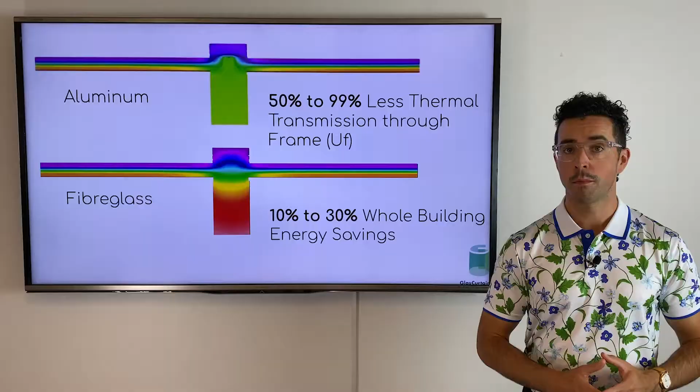At GlasCurtain, of course, we wholeheartedly believe that life and safety are paramount. And the Building Code of Canada is mostly rational in achieving this aim. But it also has newer and increasingly stringent energy efficiency and thermal performance objectives. And these can be at odds with other, older sections of the code.

So how do we square the circle, given that fiberglass materials in general and our thermoset polyester fiberglass reinforced polymer mullions in particular are considered combustible when used in an exterior window application?

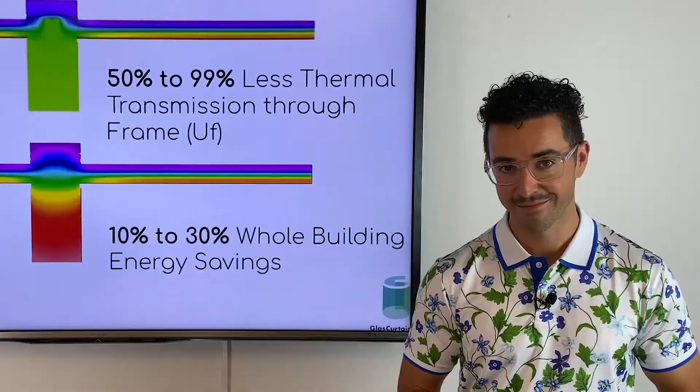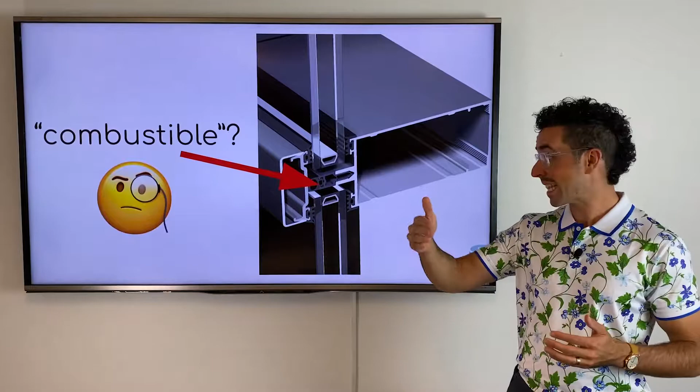While we won't dig too deeply into the problem of even defining combustible in a world where conventional aluminum frame curtain wall systems are required to use, by the Energy Code, combustible polyamide breaks at the exterior or in the center of the glazing line, the National Building Code of Canada makes exceptions and a path to acceptance for building products that can successfully demonstrate their ability to limit the severity and effect of fires,

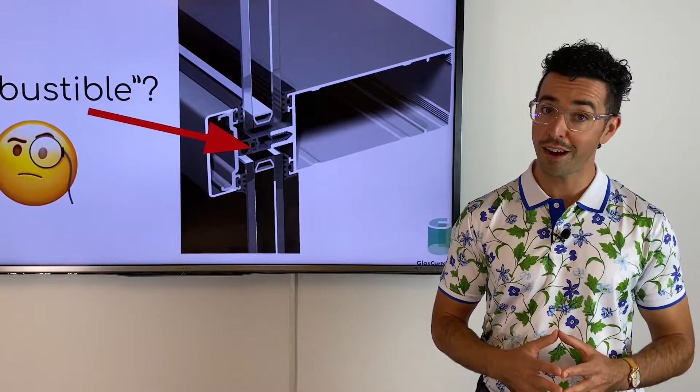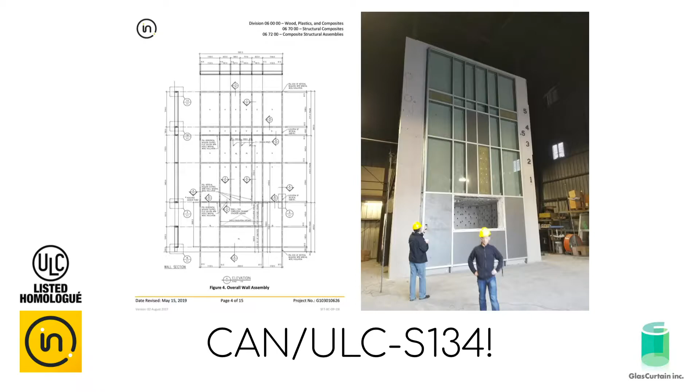the details of which are outlined in section 3.1.5.5 of the National Building Code of Canada. But the essence is basically this: pass CAN-ULC S134. So what is CAN-ULC S134? Well, I'm glad you asked.

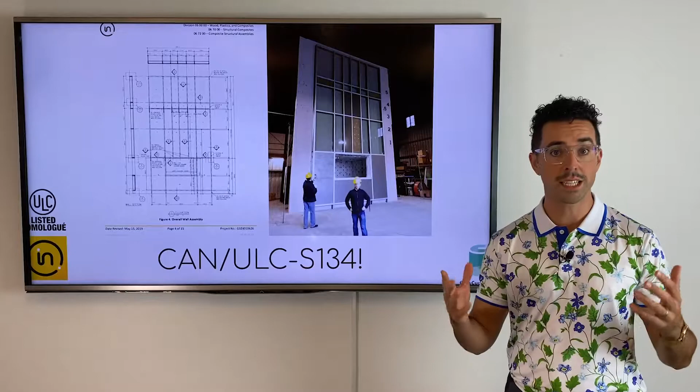Designed around a 3-story assembly, the CAN-ULC S134 test is designed to simulate a real-world scenario that tests the worst-case scenario in the event of a fire. This test is specifically designed for claddings and curtain wall systems.

With a 2.5 meter by 1.4 meter blazing inferno designed to simulate a broken window partway up a multi-story building, this rigorous and hugely demanding test starts with a 20-minute fire in the combustion chamber. The fire is then turned off after 20 minutes, and the cladding or curtain wall material then has to self-extinguish completely after a further 20 minutes.

Passing this test also requires that flame spread height and temperature flux tests also be passed. Heat flux transducers are placed throughout the assembly and cannot pass very specific thresholds for the duration of the test. For any one of those heat flux transducers to exceed their threshold is an immediate failure in the test.

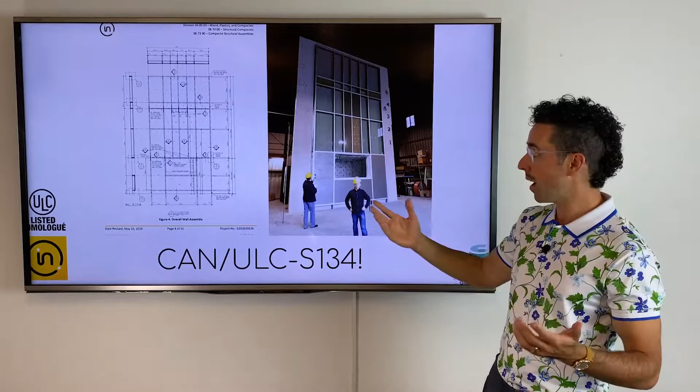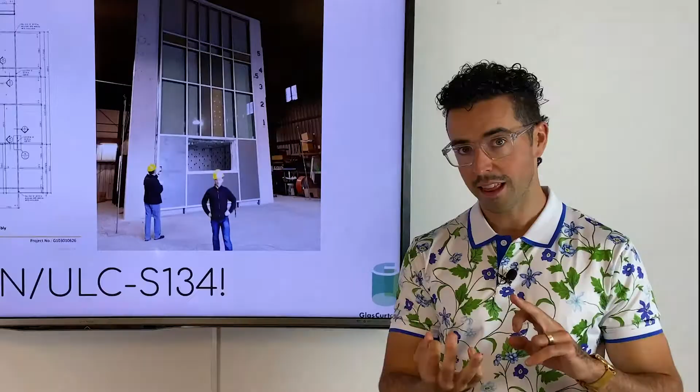As well, in terms of flame spread height, 5 meters is the limit that the flame can reach. And this distance is measured from the top of the combustion chamber. All of this is designed to ensure 3 things: that our brave firefighters have enough time to extinguish a fire, that occupants in higher floors have time to exit the building, and that the building structure itself is protected so as to limit property damage.

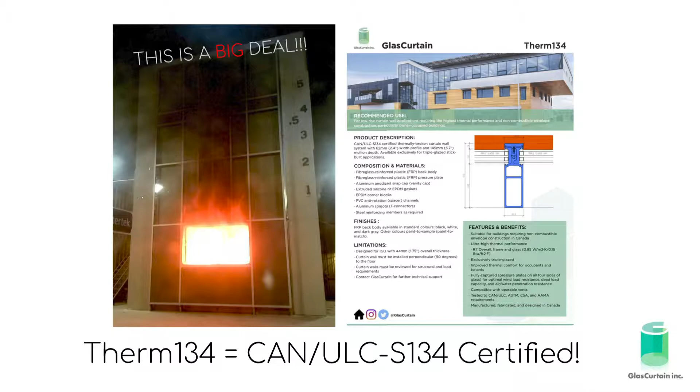As you can probably tell, this isn't an easy test to pass. So it was a very big deal when in 2018 we passed with our Therm 134 system. GlasCurtain designed, engineered, fabricated and installed this assembly, this mock-up, at the Intertek facility in Texas. Having passed this rigorous test, we've become the first curtain wall manufacturer in North America to do so.

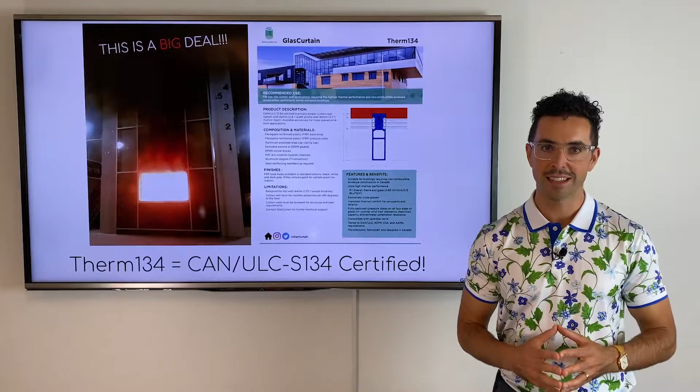Using a special resin matrix version of our standard Therm fiberglass framed curtain wall system, our Therm 134 system scientifically and categorically demonstrated compliance with CAN-ULC S134, one of the most rigorous fire codes in the world.

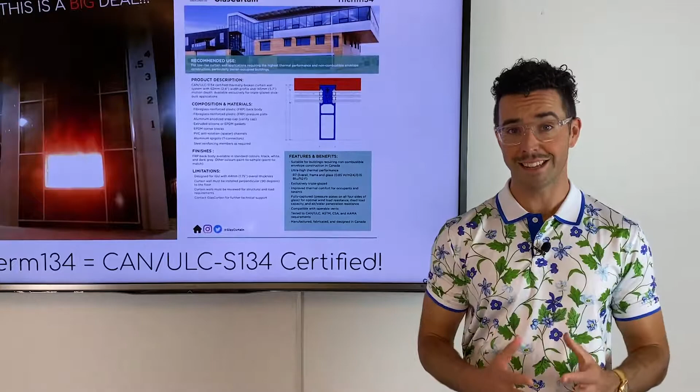With the funding support of Alberta Innovates, we achieved what had long been a dream of ours, and what had long been a dream of many in the industry: to see an ultra high performance, 100% Canadian curtain wall system manufactured and suitable for use in buildings over 6 stories tall, as well as other buildings, of course, requiring non-combustible envelopes.

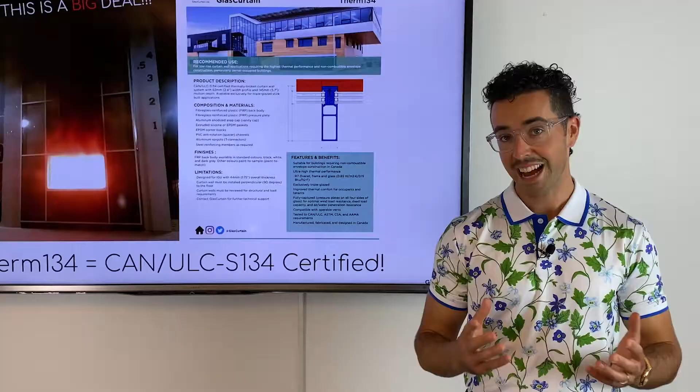For architects and designers looking to specify Therm 134, obtaining an alternate solution under section 3.1.5.4 couldn't be easier. With the adoption of NBC 2020, it's a matter of a short form, thanks in no small part to our allies in fiberglass windows, and you know who you are, and the support of Natural Resources Canada, or NRCan. Demonstrating compliance with CAN-ULC S134 has never been simpler nor more straightforward.

So that's combustibility as it pertains to fiberglass framed curtain wall systems. As ever, where there's a will, there's a way. And with the successful completion of CAN-ULC S134, our Therm 134 system gives architects and designers an R7 Plus option that can be used on any building type, including those requiring non-combustible envelopes.